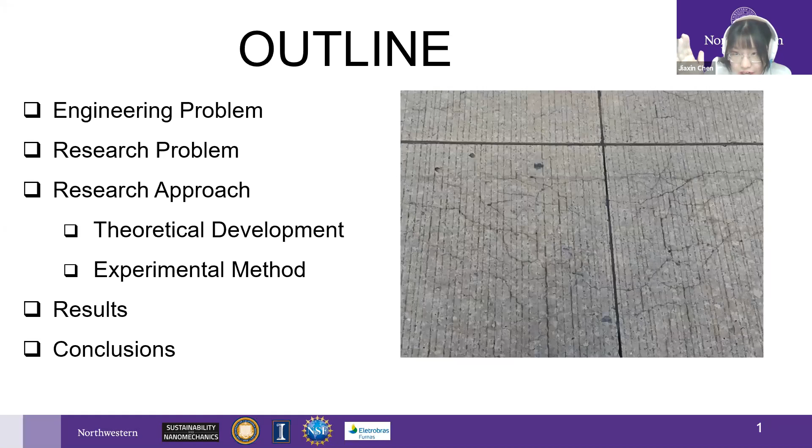This is a picture of ASR cracking. There are three keywords in this title: the first is fracture properties, the second is alkali-silica reaction gel, and the third is microscopic scratch testing. I will introduce the main term, alkali-silica reaction gel, first and explain why we want to know the story behind it. I know there are definitely a lot of experts in our department and at the SPRE seminar right now working on alkali-silica reaction, fracture mechanics, and cementitious materials. I will just give a brief introduction of alkali-silica reaction.

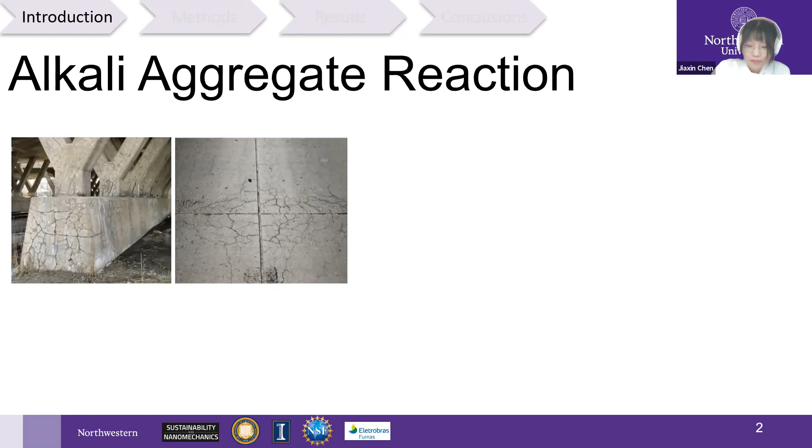First, I show some concrete with cracks, and I will talk about the alkali-aggregate reaction first. Alkali-aggregate reaction, called AAR, was discovered over 80 years ago in the 1940s. People observed cracks in many infrastructures. Some aggregates react with the alkali hydroxides in concrete, causing expansions and cracking over a period of many years. A government report by DOT, shown in the last image, showed that it occurs in many places from the East Coast to the West Coast across America. Definitely, this is not a full map of America.

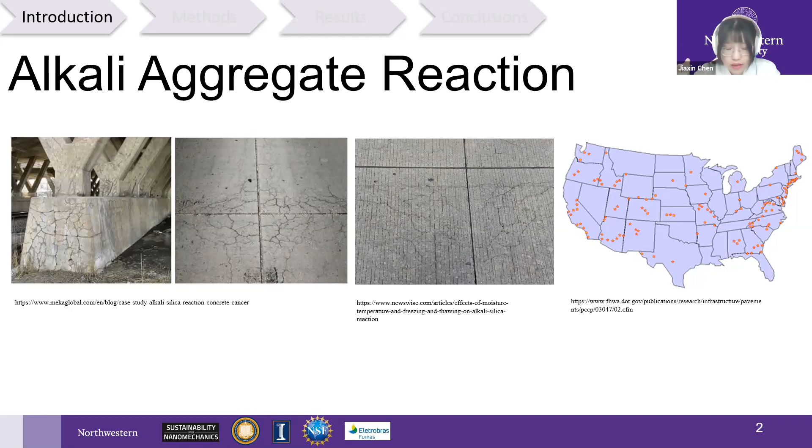There are two forms of alkali-aggregate reaction: alkali-silica reaction, which is our topic, and alkali-carbonate reaction. I will first talk about alkali-carbonate reaction. It is observed with certain dolomitic rocks. Alkali-carbonate reaction is relatively rare because aggregates that may have this problem are usually unsuitable for use in concrete for many other reasons. Therefore, we mainly focus on our topic, the more common cracking reaction: alkali-silica reaction.

There are three elements required to cause alkali-silica reaction. The first is reactive aggregate, which may contain certain forms of silica. The second is high pH, which may come from alkali hydroxide in concrete. The last is water. Here's a picture I got from a YouTube video on the right-hand side. The left-hand side shows concrete inside the building without any water exposure, while the right-hand side is outside the building, where sometimes it rains.

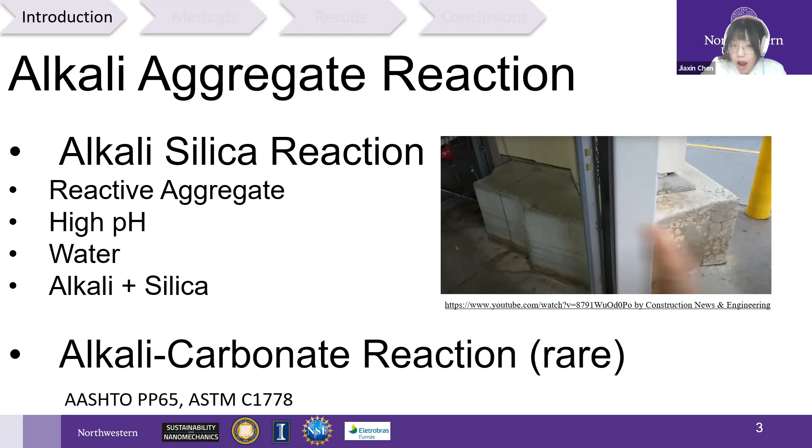Silica will react with alkali hydroxide in concrete to form a gel that swells and gets water from the surrounding cement paste or the environment. These gels can produce enough expansion pressure to damage concrete and cause cracks. We definitely don't want cracks.

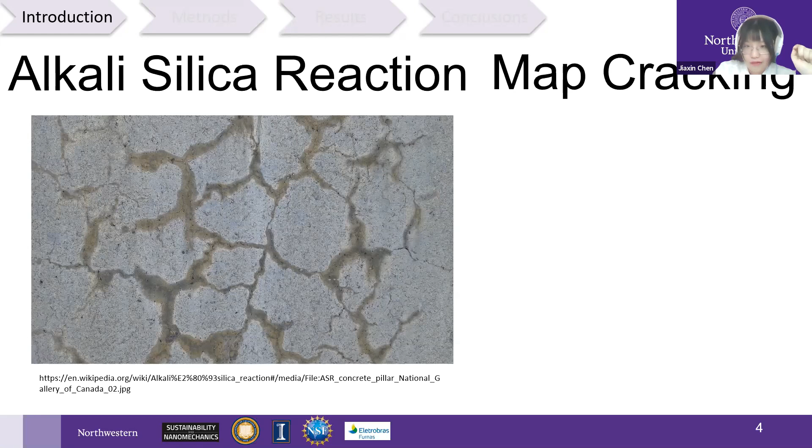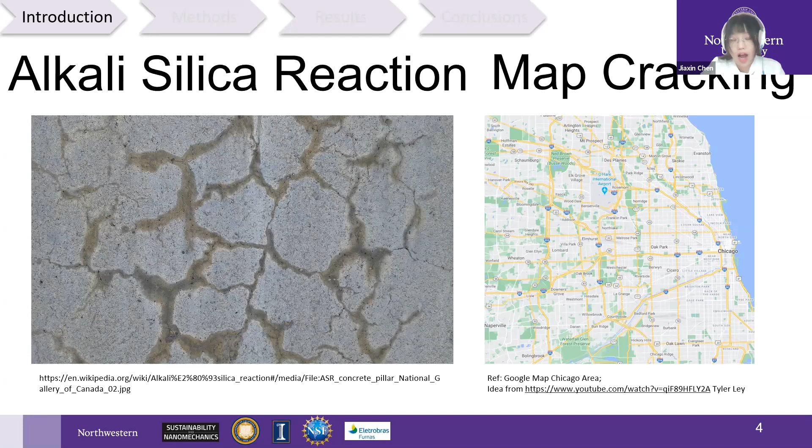So let's take a closer look at the alkali-silica reaction. When I look at the cracks, it reminds me of the Chicago map I got from Google Maps. By the way, I got the idea from Professor Tyler Ley. When we look at the roads on the map, we can see them as cracks. Alkali-silica reaction is also called map cracking as well.

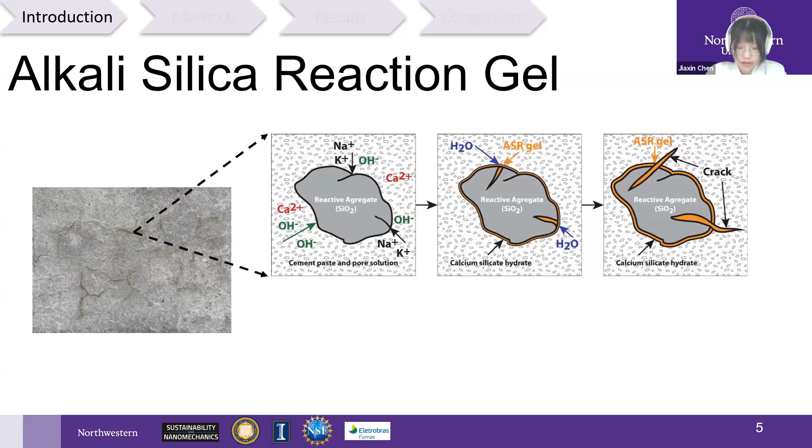Let's see where the alkali-silica reaction gel comes in place. Here's an illustration from 2019, Figueira et al. This reaction occurs between the amorphous or poorly crystallized silica contained in some types of aggregates and the alkali from the cement paste, producing a gel — that is alkali-silica reaction gel. In the presence of water, the alkali-silica reaction gel expands and produces pressure on the solid skeleton, causing overall swelling and microcrack formation in the concrete.

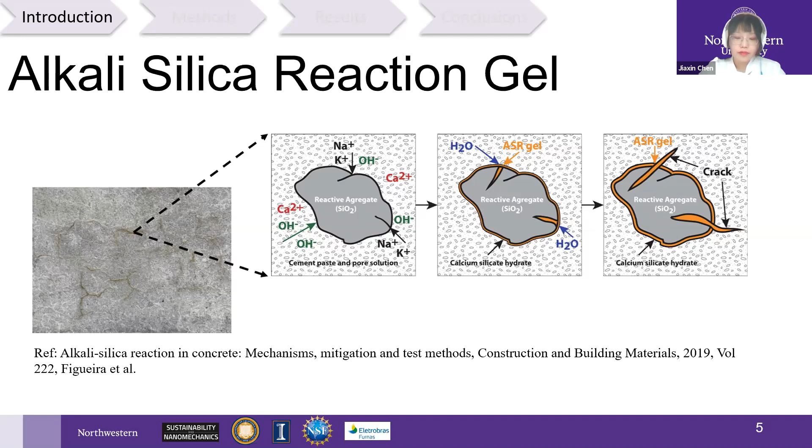Alkali-silica reaction gel causes cracks on the surface, but when the cracks get bigger and bigger, water and chemicals immerse inside the crack and will cause bigger problems.

The long-term behavior of concrete structures may depend on various chemo-physical damage phenomena. Among them, the degradation induced by the alkali-silica reaction is of particular concern for the safety assessment of several concrete dams and bridges, particularly for those built decades ago.

Many researchers have found that alkali-silica reaction gel expansion decreases the compressive strength of the concrete, decreases the tensile strength, modulus of elasticity, decreases fatigue performance, and even shear strength.

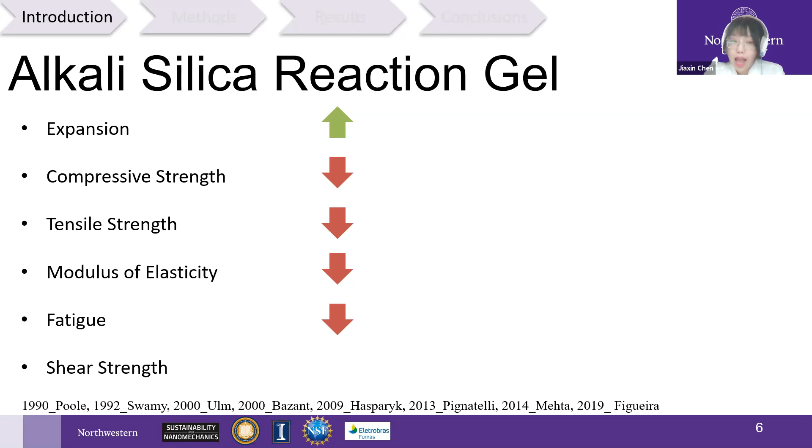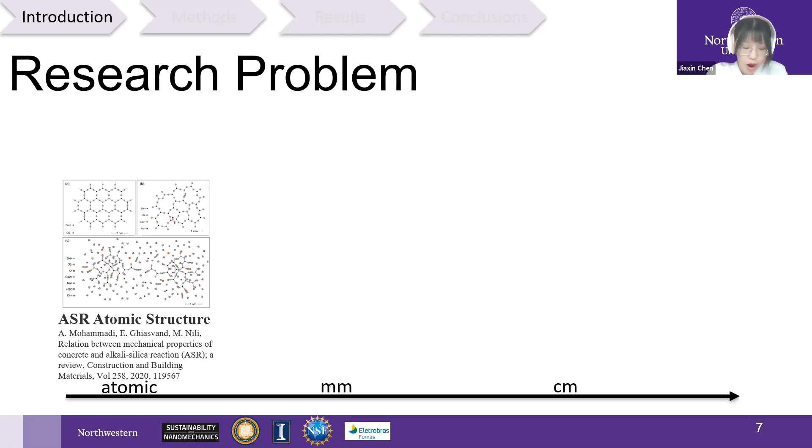So what did we do to have a better understanding of the alkali-silica reaction gel? From atomic scale, we definitely have experts in atomic scale in our department. ASR structure extends to the microscale level, which is where our research fits, studying our ASR gel, and then to the centimeter level of ASR damaged concrete.

At higher levels, such as macro scale, we have mathematical models to predict ASR damage, and simulation models developed at our department and Northwestern University CEE. We mainly focus on problems at the millimeter level in our group. Hopefully we can provide some understanding of ASR gel.

In addition, the fracture behavior of ASR gel is so important to fully describe concrete deterioration and cracking due to the ASR reaction.

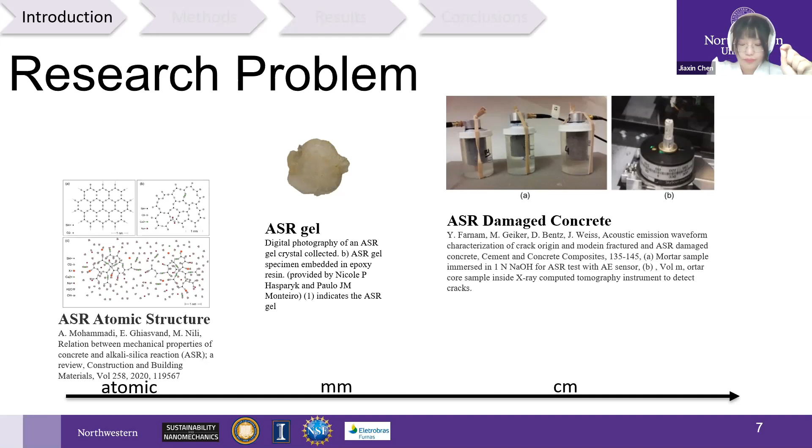The occurrence of the alkali-aggregate reaction in the concrete of the Furnas Dam was first noticed in 1976. The areas of greatest concern were the cracks on the top of the spillway columns, in the anchorage blocks of the water conduits, and in the powerhouse.

In addition to the unleveling between the central wall and adjacent blocks, in 1996 the first laboratory study was done with concrete cores from columns of spillways, and laboratory results showed a significant decrease in modulus of elasticity of the concrete columns. After that, sadly in 2002, with the great incidence of extruding gel on concrete surfaces of spillways,

a more comprehensive drilling program was performed, and the concrete cores were studied in the laboratory through mechanical tests, expansion tests, and microscopic analysis. It is definitely possible to obtain centimeter-sized gels from the inside of the galleries in a dam.

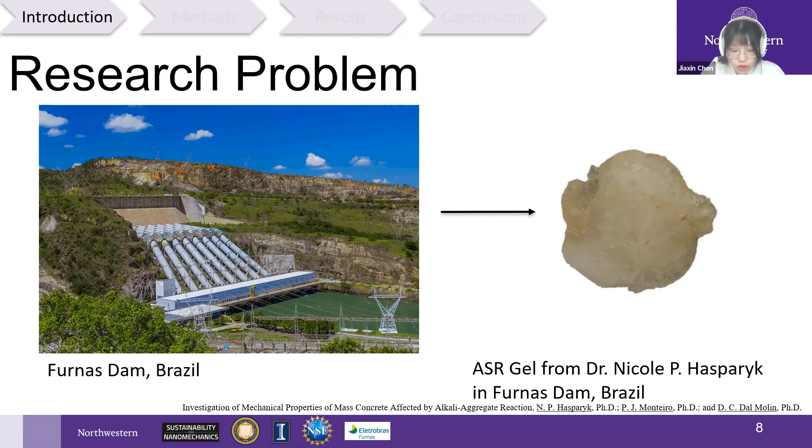For the ASR gel crystals from the same Furnas dam, to have an overall idea of these materials, previous studies have shown that material properties have been characterized by Professor Moon and Dr. Nicole, Professor Monteiro's group previously. X-ray diffraction results showed amorphous properties.

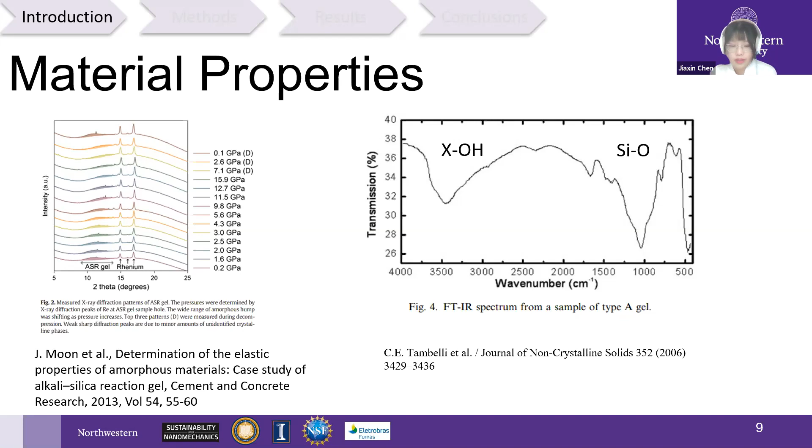In addition, Dr. Tambelli used Fourier transform infrared spectroscopy to identify chemical groups of the ASR gel crystals. Definitely more details can be found in their papers as shown in the reference. But our group focuses on the fracture behavior of the alkali-silica reaction gel.

How can we characterize the fracture behavior of this small gel? From the image, it has a scale bar of 4 millimeters. For the US system, that's around 0.16 inches.

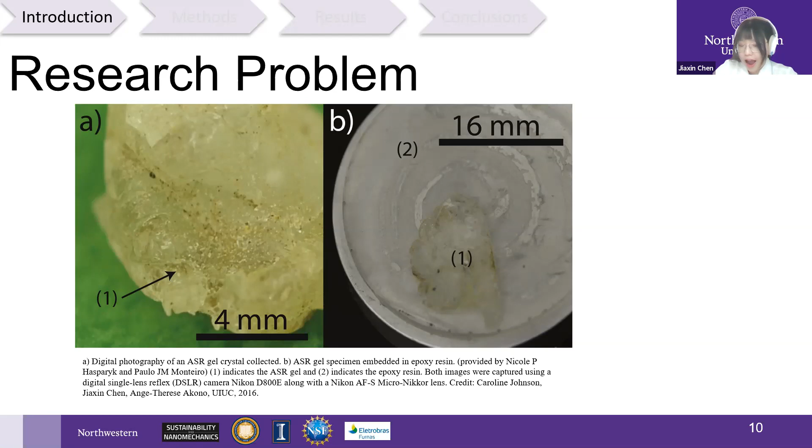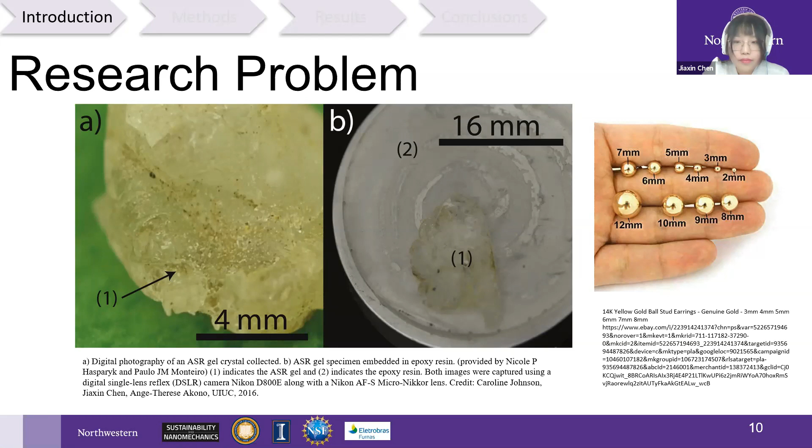We used a traditional method, still a classic method, called scratch test, but at micro scale level. The advance of instrumented scratch testing in the late 1980s led to a broader range of applications for scratch testing.

These applications include but are not limited to the strength of ceramics, damage of metals and polymers, polymer films back in 1998, soda lime glass in 1998, and our current work on scratched cement. Here are some microstructure images from previous studies using scratch testing.

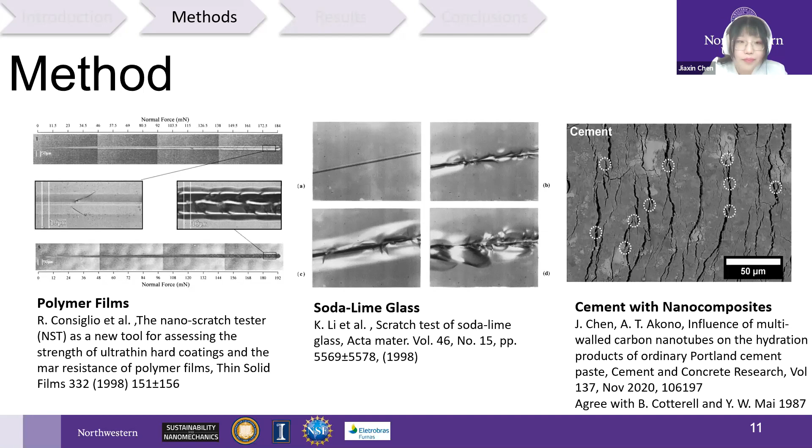The basics of the scratch test actually date back to the Hellenic era, where scratching was utilized to rank minerals according to their relative hardness. Here's a short video by Professor Abuhaikal at MIT CSHub to illustrate the fundamentals of scratch testing.

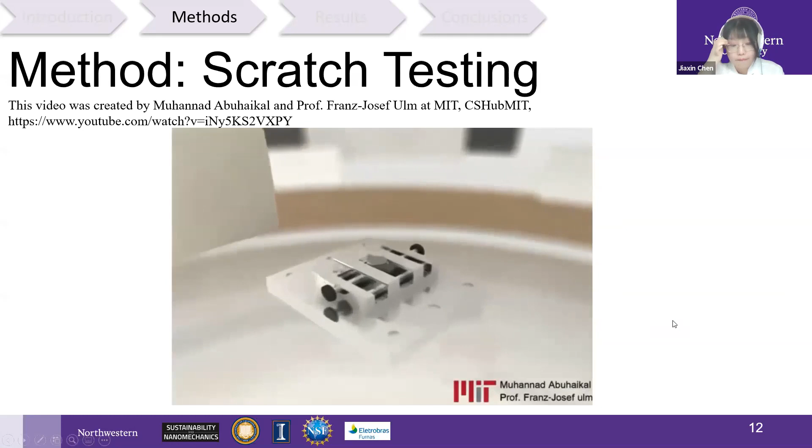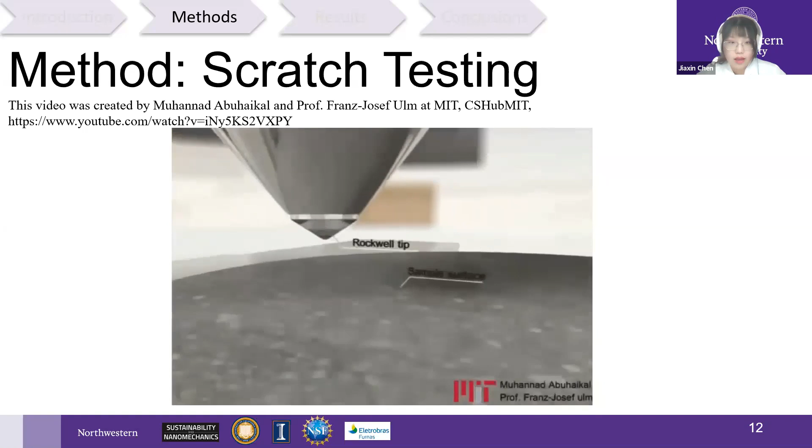So this is the sample. You can see the flat and smooth surface of the sample. And this is a Rockwell tip.

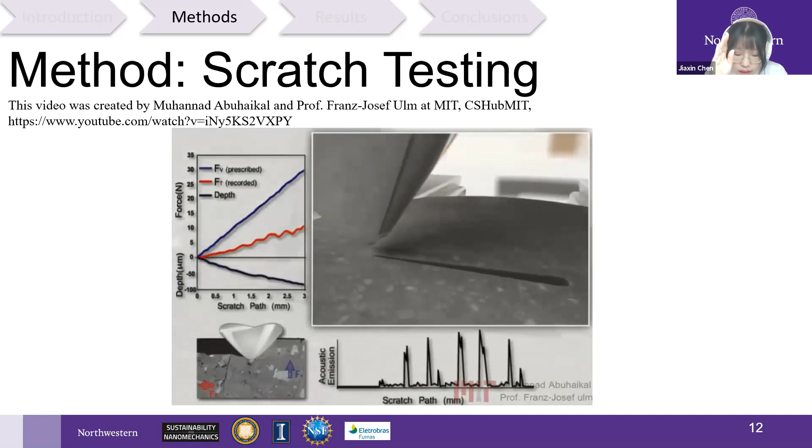The Rockwell diamond indenter was pushed across the surface of the sample material while linearly increasing the vertical force, as shown on the left-hand side. The penetration depth and the horizontal force were recorded as shown here.

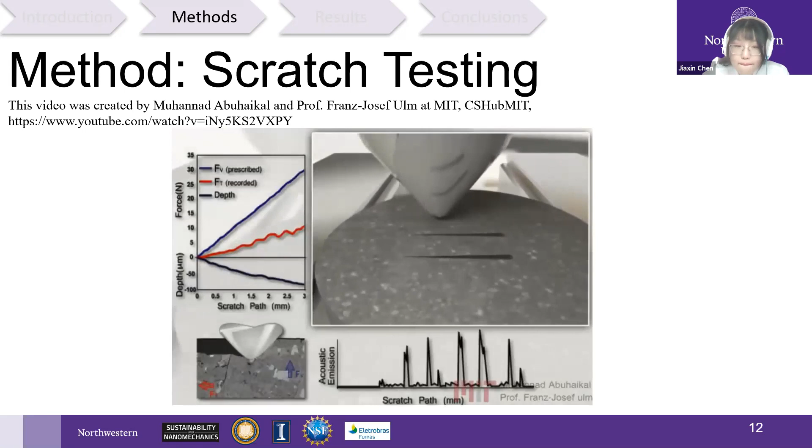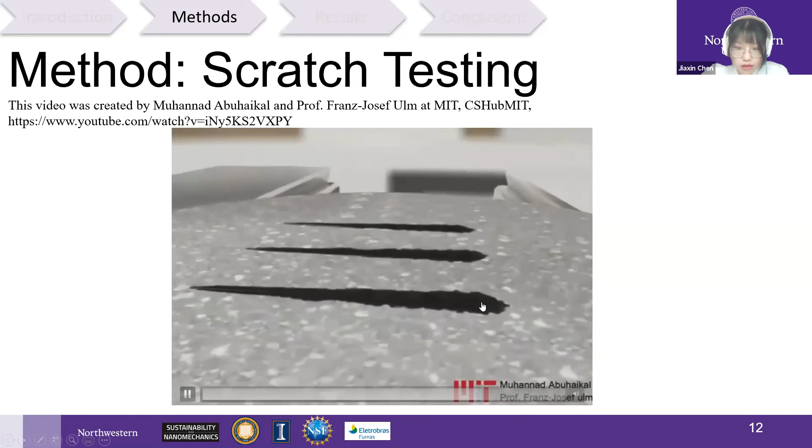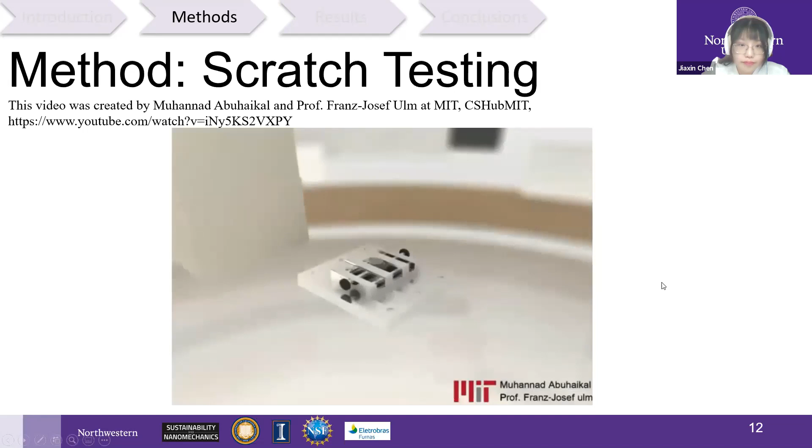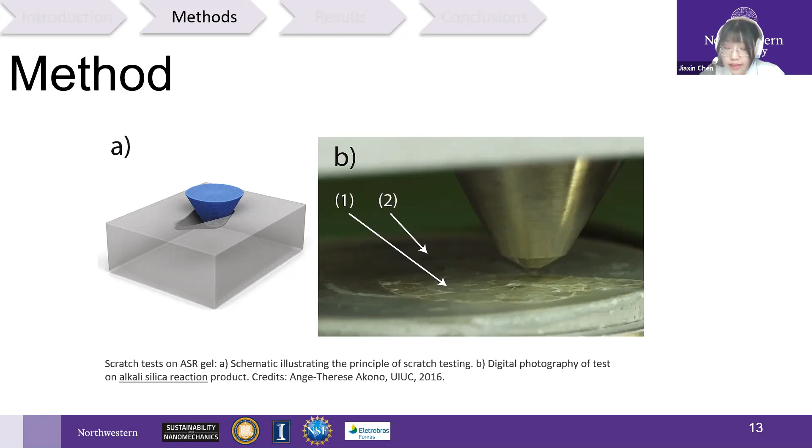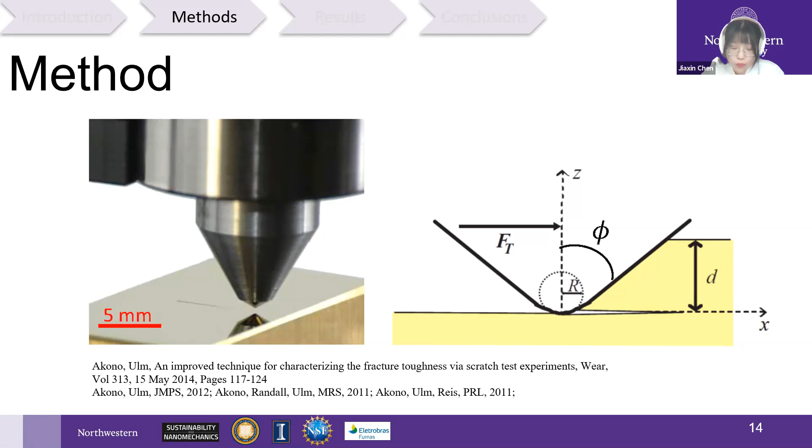The challenge here is to carefully prepare a specimen of ASR gel crystals and design the experimental parameters that can be tested using scratch testing and satisfies the assumptions for obtaining the fracture toughness.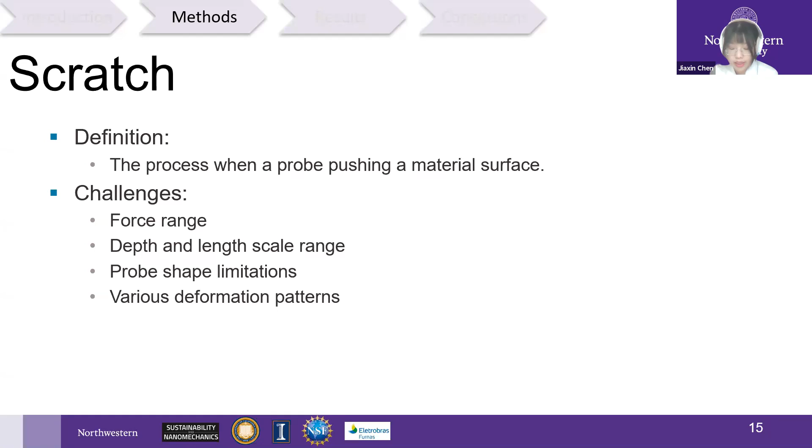For scratch testing itself, in other words, it is the process when a probe pushes into a material surface. The four main challenges during scratch include the force range, the penetration depth and length scale range, the probe shape limitations, and various deformation patterns.

In terms of the analytical model of scratch testing, we assume linear elastic fracture mechanics and use the Airy stress function for sigma xx, sigma xz, and also phi xz, and the plane conditions were derived accordingly.

Consider a scratch test in a linear elastic, chalky material with a crack emanating from the tip of the probe. We can then evaluate the rate of change in potential energy in a material volume surrounding the crack from the perspective of an observer that moves along that crack.

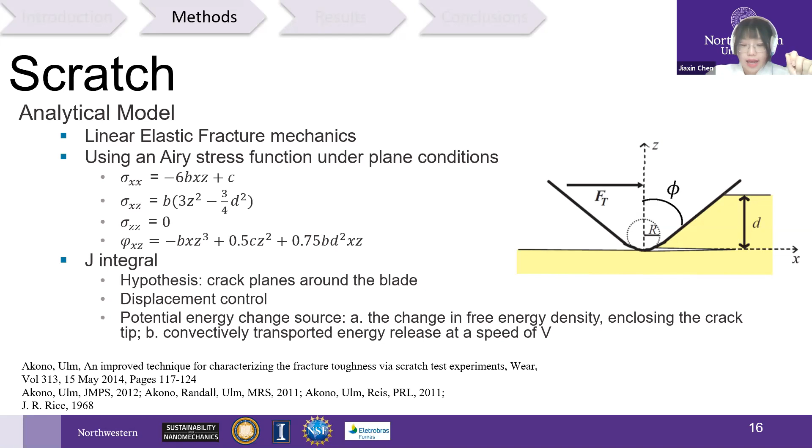This leads to applying the famous J integral to calculate the energy release rate, knowing the stress and strain distributions ahead of the probe.

In addition, another important element is the probe shape. When the penetration depth, which depends on the force in the experimental setup, is less than the spherical-to-cone transition depth of 27 micrometers, we are in the spherical probe regime. When the penetration depth is bigger than 27 micrometers, we are in the conical zone.

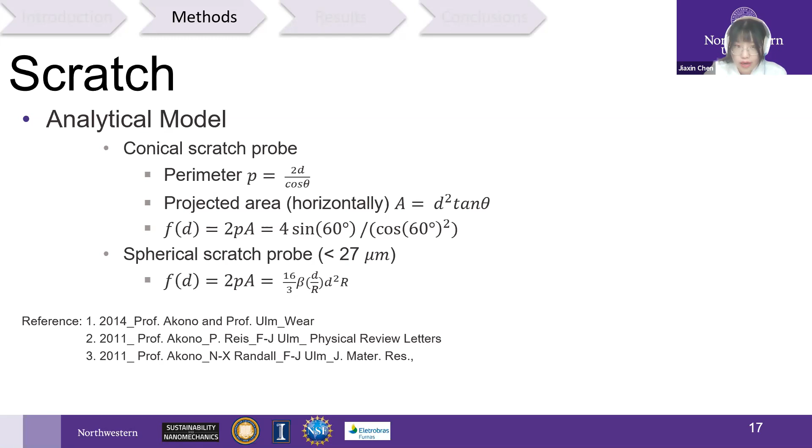In order to have a simpler probe shape and avoid further decoupling, careful selection of vertical force needs to be considered. This requirement sets the limit for our experimental force range.

To summarize the scratch method, we mainly have six steps. First, we start from cutting with the existing crack and then use the general J integral and stress function.

Afterwards, we start with dimensionless analysis, neglecting rate and thermal effects, then inverse application to get the fracture toughness. Moreover, we calibrate the probe function with our scratch tip geometry.

We can then evaluate the rate of change in potential energy in a material volume surrounding the crack tip from the perspective of an observer.

The fourth solution leads to the following equation connecting the horizontal force Ft to the fracture toughness Kc, which is: Kc equals horizontal force over square root of 2Pa. And 2Pa is the probe shape function that depends on the geometry of the scratch probe as well as the depth of penetration d.

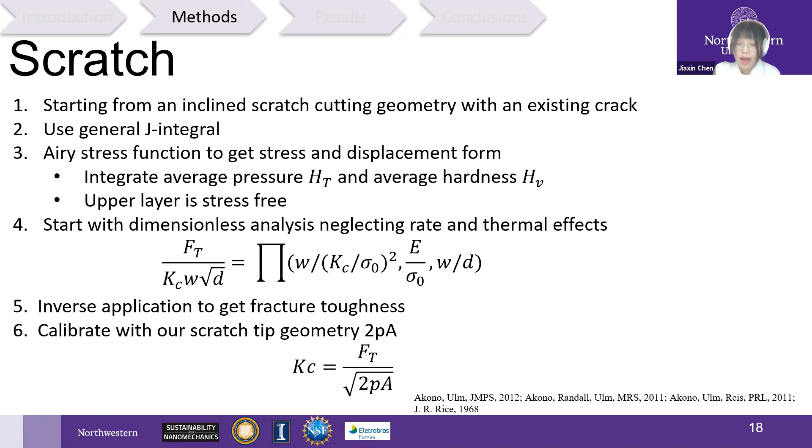More details can be found in the reference paper. For a spherical probe, the shape function is a projected function of the penetration depth. And for a cone probe, it is another function of the penetration depth.

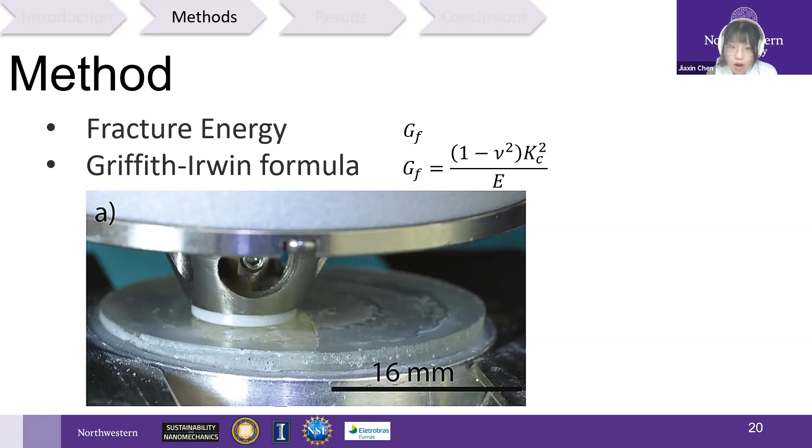Talking about fracture, we usually think of fracture energy, GF, by the Griffith-Irwin formula in linear fracture mechanics. We know fracture energy relates to Poisson ratio, fracture toughness, and elastic modulus. We have got fracture toughness using scratch test. How can we obtain elastic modulus of ASR gel crystals?

From the image, some of you may think of indentation test, and yes, we did indentation to characterize the indentation hardness and modulus. But what is indentation? To determine indentation, a hard tip whose mechanical properties are known is pressed into a sample whose properties are unknown with the applied load.

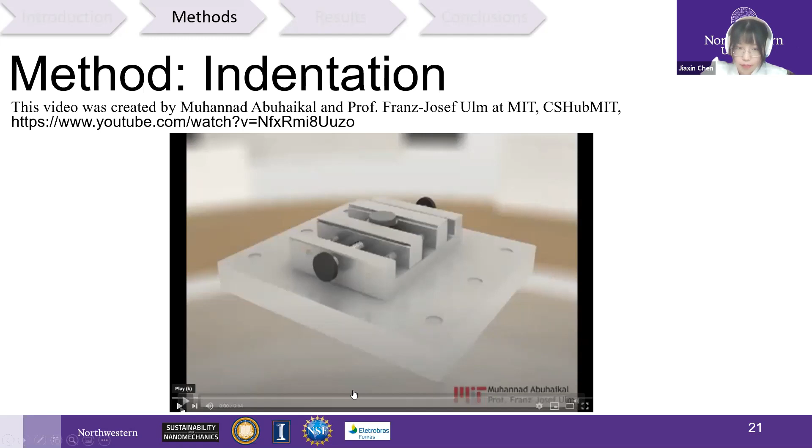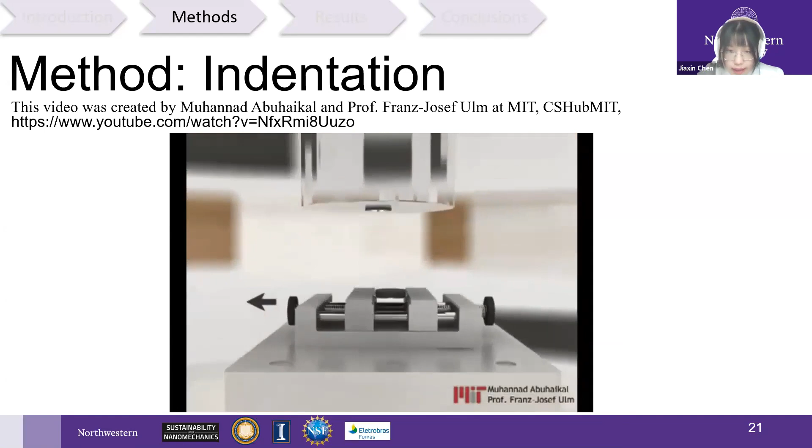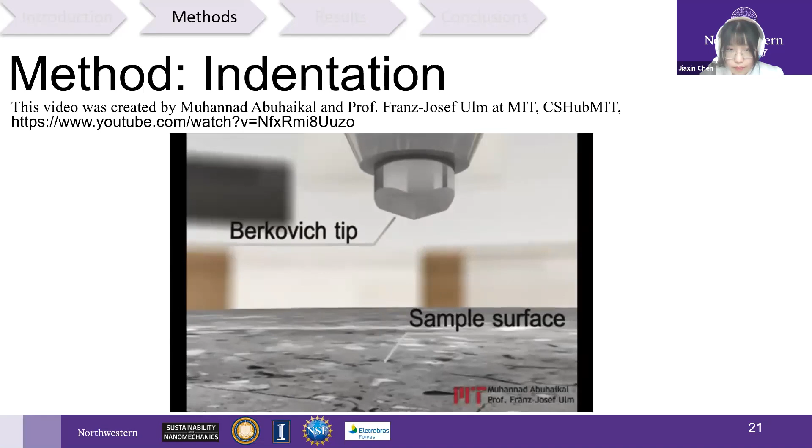Here is our sample and the sample holder. When we get the indentation test, the sample holder goes up and the indenter goes down. The Berkovich tip is pressed into the sample surface, and we got the force and penetration depth.

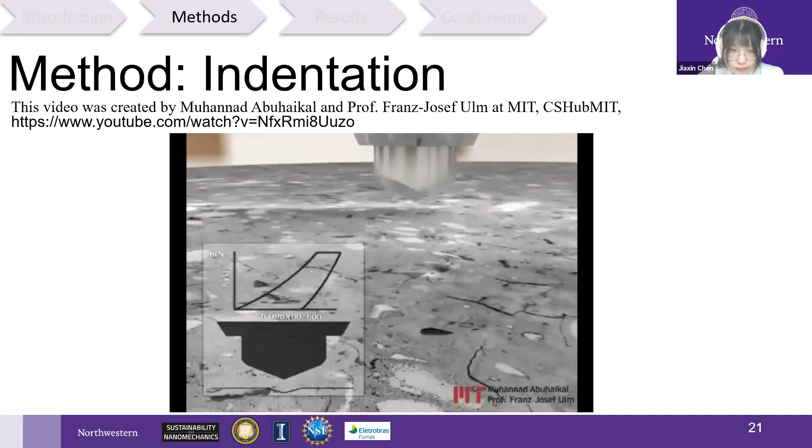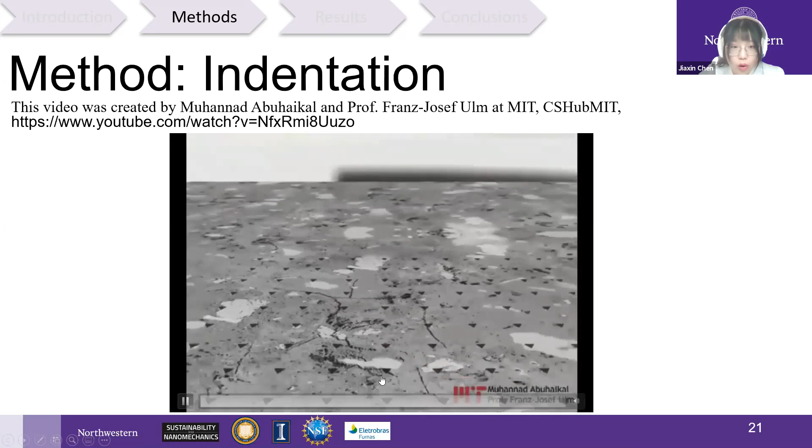We can also set up a grid indentation automatically, as shown here, the first one and the second one. But we have a spacing three times the penetration depth to avoid overlapping. Here's the grid indentation result.

Let's take a closer look at the indenter and the raw data from the indentation. This is a curve with load and displacement. The left-hand side is the loading part, while the right-hand side is the unloading part. We used a Berkovich diamond indenter on an Anton Paar nano hardness tester. Vertical force P and penetration depth H curves were obtained from the depth sensing equipment.

We applied Oliver and Pharr's method, as shown here, to obtain indentation hardness and indentation modulus. The right-hand side demonstration indicates that the sample preparation needs to be precise and the sample surface needs to be flat and smooth. The same rule applies for scratch testing, as we can see here.

So here comes our key challenge of sample preparation. In order to have a uniformly flat and smooth surface with low roughness, we applied a metallographic polishing step. The objective of this step is to increase the accuracy of small-scale mechanical testing. The rule of thumb, created by Miller et al. in 2008, is to have a surface roughness less than 1/5 of the maximum penetration depth.

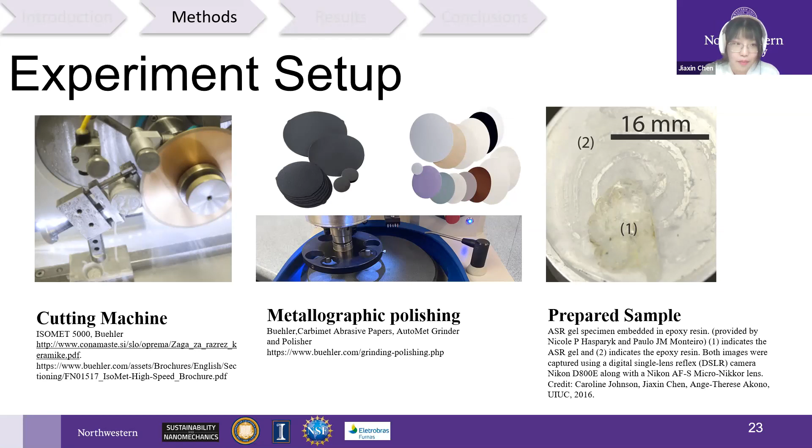The previous slide mentions epoxy embedding to contain the shape of ASR gel. I will provide more details here. Each ASR gel specimen was embedded in a 32 mm cylindrical mold filled with epoxy cure resin. Epoxy embedding is used to provide structural support and facilitate the metallographic polishing phase.

The first specimen is air embedded, on the left-hand side, meaning we embed our specimen at room temperature in normal conditions, as shown. The other, which we call specimen 2, we embedded under vacuum. During vacuum embedding, the epoxy resin is pushed into microscopic pores, resulting in a smoother surface. We can definitely see it here on the right-hand side.

From both images, it seems like our surfaces look smooth, even though there are some cracks. But because of the pre-cracks seen in the microscopic images, we know that when we design the parameters of our scratch testing and indentation, we need to have a shorter length and force limitation.

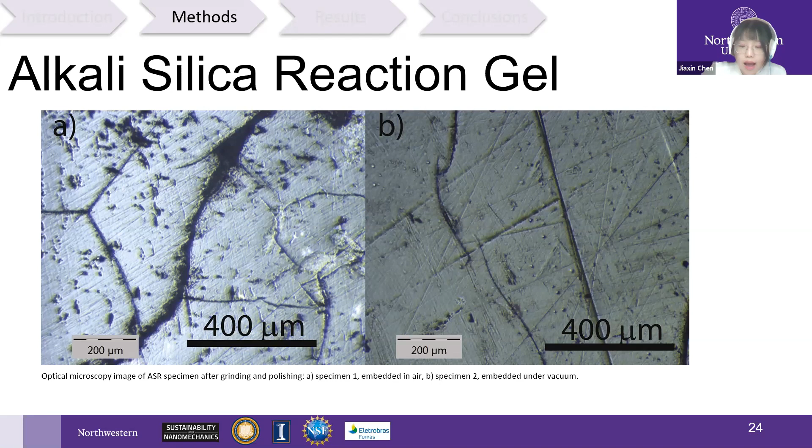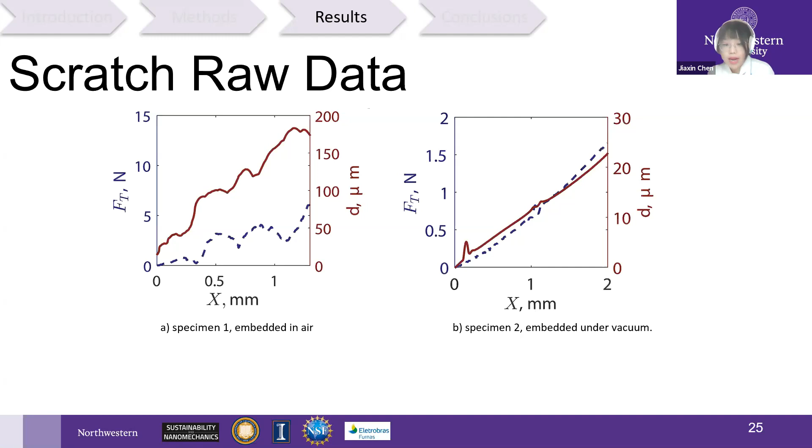In contrast, we used a maximum vertical force of 10 Newton for the vacuum embedded specimen. During epoxy embedding and vacuum, the resin is pushed into the microscopic pores due to the vacuum. Unfortunately, this results in a composite structure at microscopic level consisting of the resin and the ASR gel. Therefore, we purposely selected a lower force to obtain a depth of testing in the microscopic range. The maximum penetration depth in this test was 28 micrometer, as shown in the right-hand side figure. The scratch length was 2 mm for both specimens.

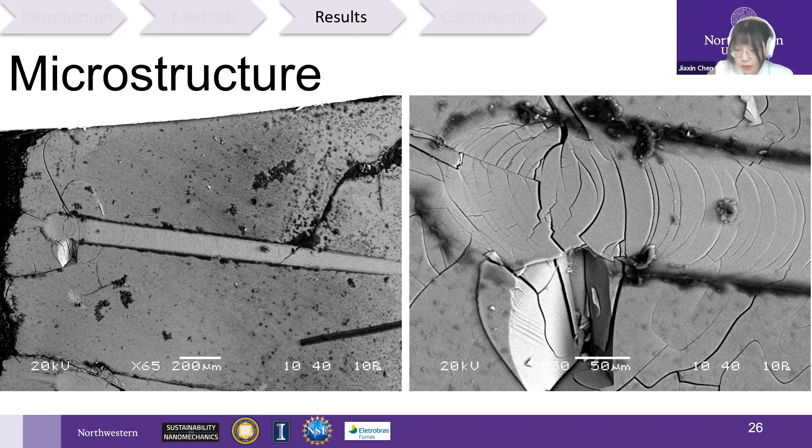After scratch testing, the top surface of the specimens were examined using scanning electron microscope at different levels of resolution. Let us take a closer look at the fracture surfaces. The first figure represents the scratch panorama. We can see that the scratch starts from the right-hand side and then stops at the left-hand side. The second figure is a closer look at the final location of the scratch testing. When we zoom in, here comes the most interesting part.

We observe curved cracks, regularly spaced and perpendicular to the direction of testing. The arrow represents the direction of the testing. At a higher magnification level, new created fracture surfaces can be seen on the right-hand side figure. The presence of these fracture points point towards the predominance of fracture dissipation and motivates fracture analysis of our test data.

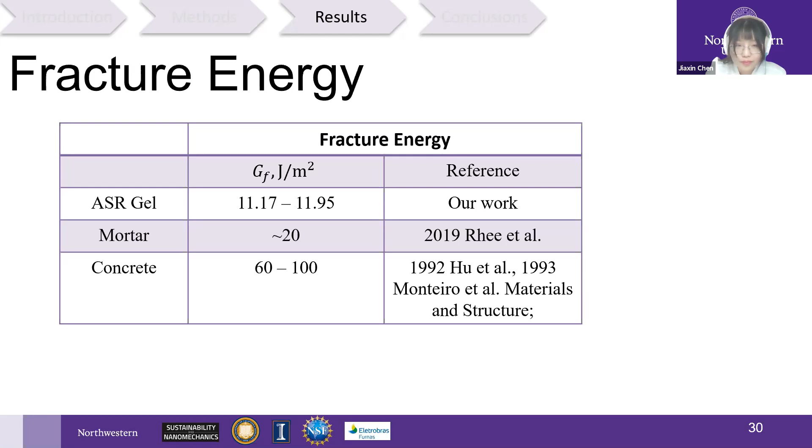In conclusion, we use the scratch test to characterize the fracture behavior of alkali-silica reaction gel. To validate our method, we used indentation testing, and our indentation results of elastic modulus agree with other measurements.

For fracture toughness, scratch testing has been applied to many other applications. For ASR gel crystals, we got 0.59 for air-embedded specimen, and 0.62 for vacuum-embedded specimen. By combining the indentation with scratch testing results, we estimated a fracture energy of 11.17 and 11.95.

The fracture energy of alkali-silica gel is an order of magnitude smaller than that of concrete, and 2 times smaller than that of mortar. I will end my presentation with our scanning electron microscope image of ASR gel crystal fracture surface on the top. Thank you very much for your time and listening.

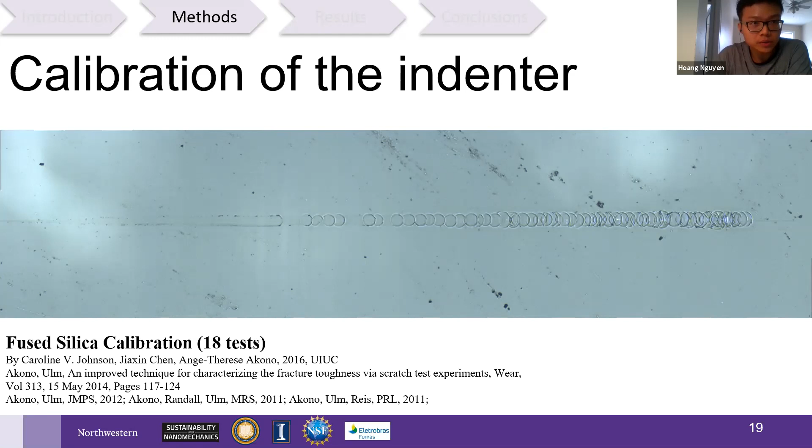From my understanding of the talk, the fracture energy is from the surface you created when you scratch away the materials, right? And also from the SEM image, there's some subsurface crack. In the calculation, do you have to consider the crack length of those subsurface cracks that you created? Because that must dissipate part of the energy, right?

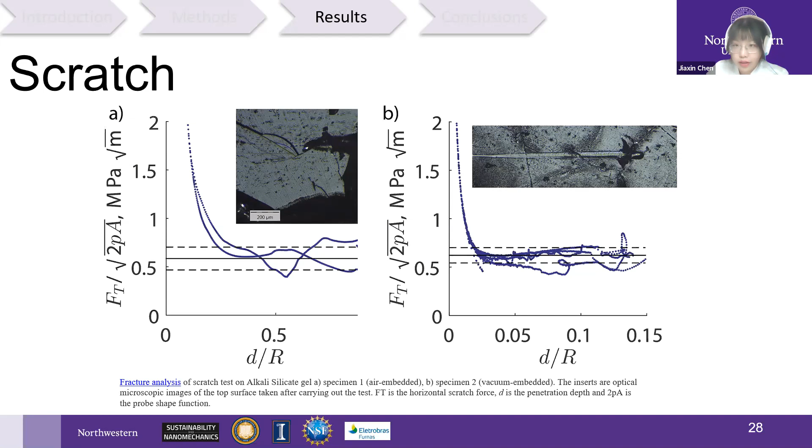Yeah, that's definitely a great question, but for my understanding, maybe not correct. When we calculate our fracture toughness, we didn't think about the energy dissipated from the small cracks. We only consider the big cracks, like the curved crack surface shown here. So when D over R is really large, we consider FT over square root of 2PA, which goes horizontal and converges to a value, and we obtain that value as our fracture toughness. As you said, we definitely have some small cracks developed, but for the model we haven't considered that in the calculation. The main point is the curved fracture surfaces, but we can later add that energy and see what happens.

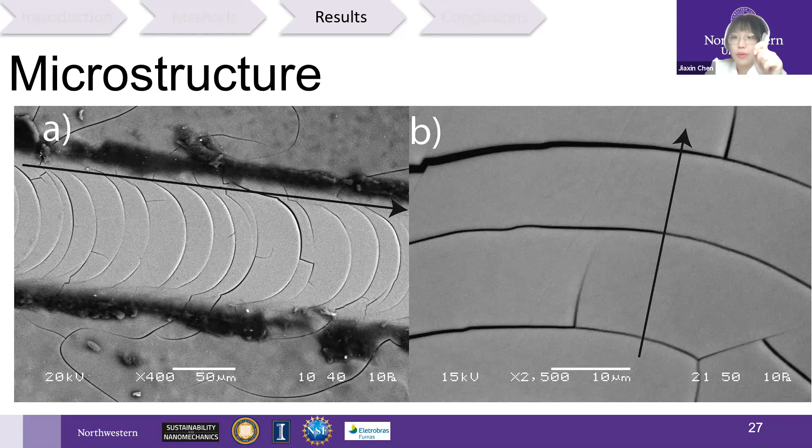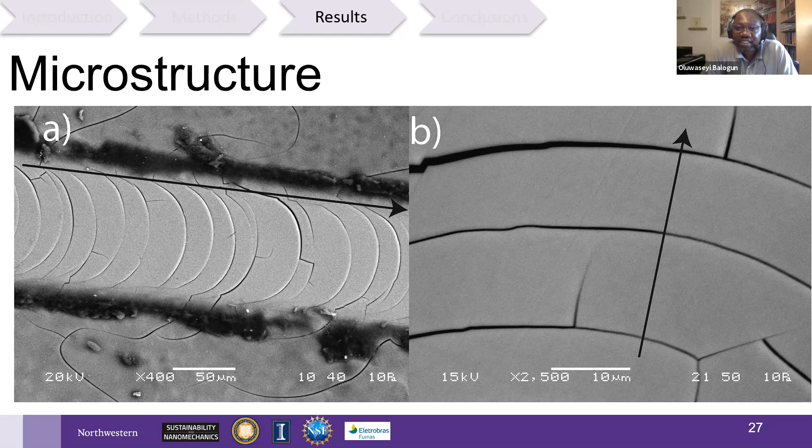That's a good point. Okay, right now it's 12:27. We have time for a few more questions. Okay, I can take a shot at it.

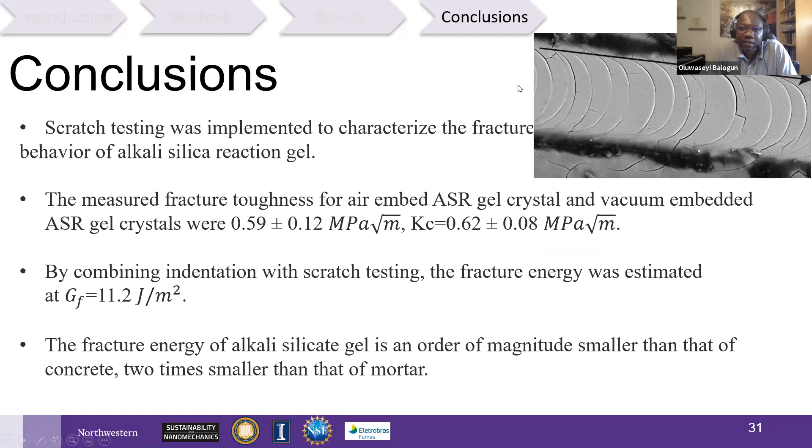If you go to slide 29, I was curious about the dependence of your indentation modulus on the fact that you're in air or in vacuum. If we think about the modulus of the material as being intimately connected to the interatomic bond stiffness, I'm not sure exactly why you see a difference between the moduli of the two materials.

Yeah, that's another question we had when we did the experiment. We have the same question. Even though one was embedded in air and the other embedded in epoxy, they should have a similar value. I think another point is because we used different loads for different specimens. We can definitely design a better experiment, but time has passed. For the air embedded one, we used a higher load of 100 millinewton, and for the epoxy vacuum embedded one, we used 2 millinewton.

So we think, okay, one assumption is this is a macroscopic indentation and this is a microscopic indentation, so that's why we have a small difference in the value. But I don't have a really good answer for that. When we calculate the elastic modulus and also the fracture energy, they actually agree with each other, like 11.17 and 11.95. We definitely have a difference in terms of the indentation modulus for different types of preparation, but it would be good if we applied the same load on the two different specimens and see the values.

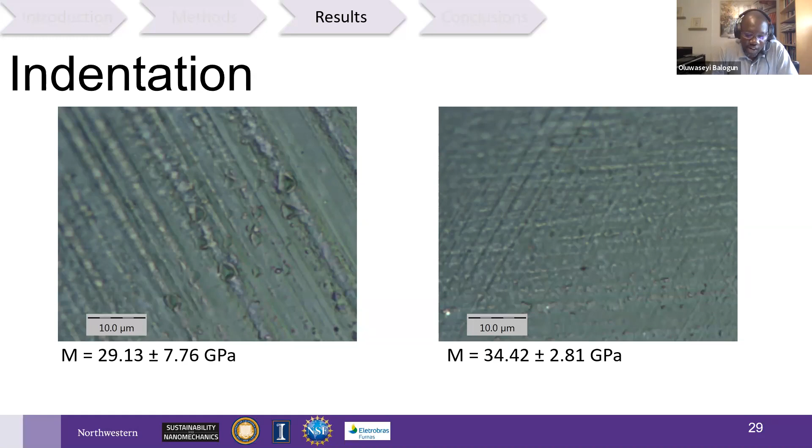It's sunny, maybe warm, I haven't been out there yet. Cold but sunny. Oh, cold and sunny. Okay good, it's virtually nice. All right, so have a wonderful rest of your day. Bye.